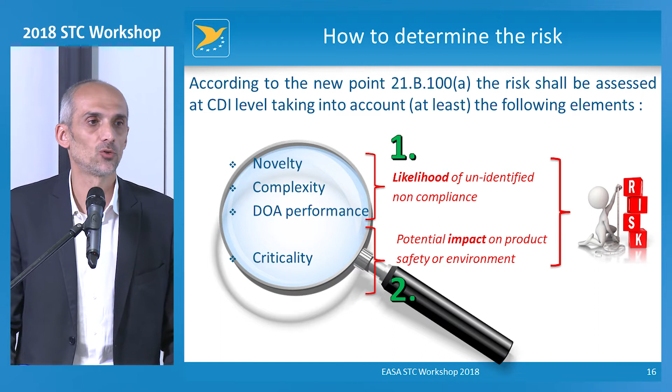The new Part 21 does not tell you anything else. It does not tell you how the novelty is to be determined, or complexity and so on. And it does not even tell you how the likelihood and the impact on product safety or environmental protection work together. So to find additional guidance on these elements, we have to look into the AMC/GM to Part 21 and the certification memorandum on LOI that we published last year in January. In the next slide, I will show you what is in these documents.

So, novelty. According to our certification memorandum on LOI and the AMC that we published in NPA 2017-20, consulted last year, novelty is classified as a binary element. One CDI can be either novel or not novel. We don't have any intermediate possibility, only black and white. Novelty can be driven by technology, operation, installation, new requirements, or use of means of compliance. This is just a quick summary; the guidance gives a very detailed description.

And novel can be for the applicant or for the agency. I think it's quite rare, but if an applicant already has good experience on something which is new for the agency, then it has to consider this CDI as novel, even if it already has some experience.

With the criteria of novelty, things can change over the years, because something which is novel today can become no longer novel in the future if you continue working on this kind of technology or operation. In the same way, if your experience on that technology is very old, like 10 or 15 years, then you should consider this technology novel again, because probably you don't have...

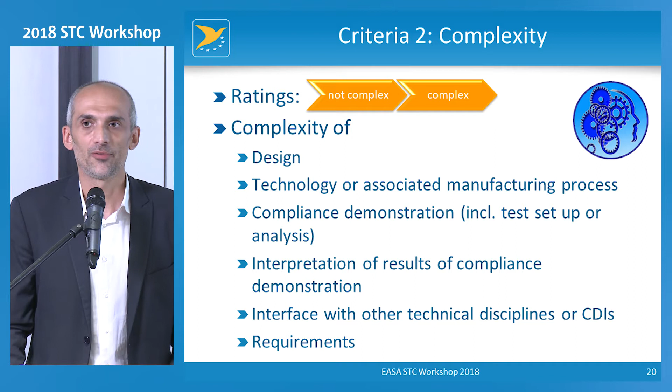Then the third element of the likelihood of an unidentified non-compliance is the DOA performance. In this case, the rating can be on 3 levels. The first one is low or unknown, for example, for a new organization. Then medium or high. The applicant does not have to make any specific evaluation on this, because the DOA performance is provided by the agency. And normally it is provided at panel level if we have enough information.

Okay? So in general, the red indicator is the indicator to be considered when you have to determine the DOA performance for your CDI. In case the red indicator is not available, because it can be that for some panel we don't have enough data, then you can consider the overall indicator of your DOA. This is what the guidance tells you in the AMC GM to Part 21.

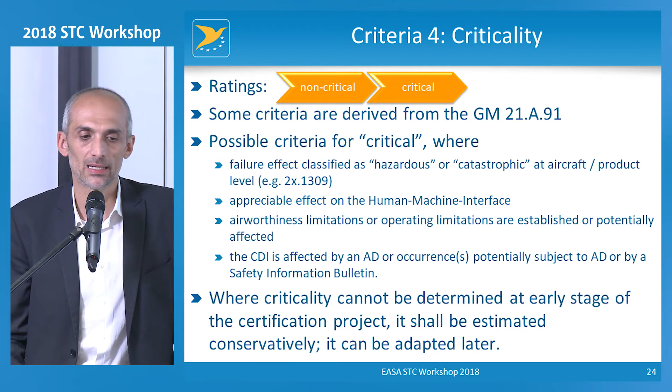I'm quite quick on this point because I explained this last year, and now I want to focus more on the feedback that we had during the advanced application phase. We have these 4 criteria, and now let's see how these 4 criteria work together. This slide is a repetition of what we have already seen before. Part 21 gives you the criteria, but does not tell you how these 4 criteria can work together. So now, what I will show you is how they work together.

And to see this, we have to open the certification memo on LOI and AMC GM to Part 21. So in these documents, we find 2 matrices, which tell you how the criteria work together. The first matrix is the matrix used to determine the likelihood of the unidentified non-compliance with the certification basis. In this matrix, we enter, in the horizontal axis, with information related to novelty and complexity. So we reduced the matrix a little bit to 3 columns to simplify it.

So in the first column on the left, you have a CDI which is not novel and not complex. So if this is your case, you enter in that column. Or if your CDI contains some elements of novelty but not of complexity and vice versa, you will enter in the middle column. And in case your CDI contains both elements of novelty and complexity, you have to enter on the right column.

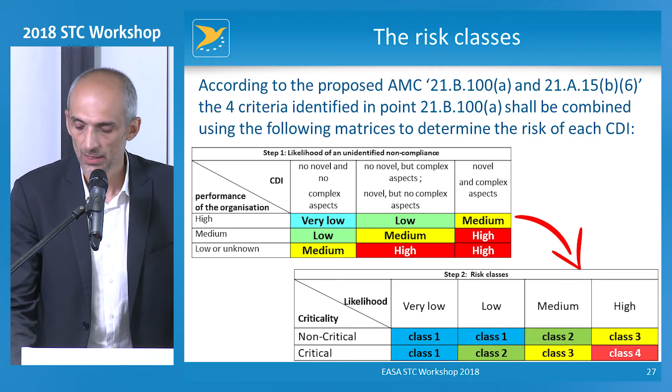Then what does it mean, risk class 1 or 4? According to the information that we provided in the guidance, risk class 1 means that for that CDI, there will be no more involvement of the agency. So no element should be retained by the agency within that CDI. If the CDI has a risk class 2, there will be few elements, meaning documents or in very rare cases some activities, which can be retained by the agency, but the vast majority of the documents, data, and activities contained in that CDI should not be retained by the agency.

Then, for risk class 3 and 4, there will be more and more involvement of the agency. We don't have any fixed value, and even risk class 4 does not mean that the agency will be involved in all the activities or documents or data contained in that CDI, but as a measure of involvement, risk class 3 and 4 means that there is more and more involvement of the agency.

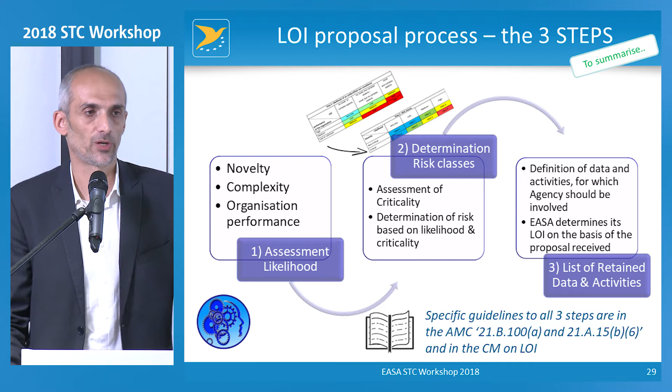On the bottom, you see specific guidance for all these steps is provided in the certification memorandum LOI and in the AMC 21.B.100(a), 21.A.15(b)(6). This applies to all applications for a new TC, for an STC, for a major change or a major repair.

So if you want to make a break.

Yes. So, not surprisingly, we have lots of questions. Yeah. You can go, Franz.

Redak here. So first question, is there any introduction of time frame considerations in the LOI for the certification plan, certification program assessment from EASA? No, in the guidance material, AMC of Part 21, you will not see any statement for this. But internally, we are trying to speed up this process. We have an internal KPI to speed up this. If you expect to see something at the AMC level, you will not find anything there.

But again, this is a commitment that we want to take, and we have already taken. So we are monitoring our performance in this respect. It's true that when we receive complete and mature proposals, this will facilitate our determination of level of involvement. This is obvious, but yeah. We know that we have to ensure a good performance in this frame, and we have an internal KPI to do that, but that's all. Thank you.

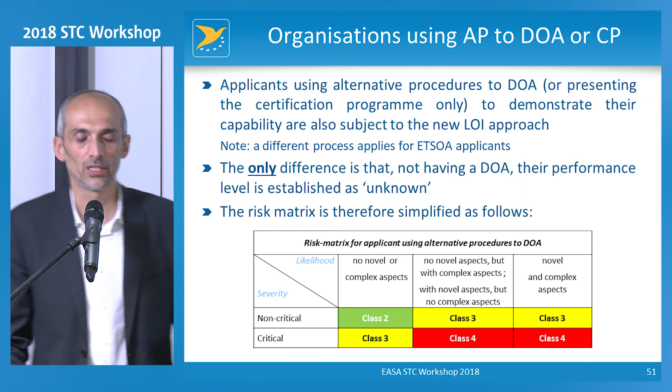So basically what I told you until now is valid also for applicants without a DOA, provided that they apply for a new TC or whatever. We have published an MC focusing on this kind of applicants. So we can also accept applicants without a DOA for the advanced application phase. So if any AP to DOA is interested to join this advanced application phase, we now have the possibility to test the guidance, and we will welcome them.

I just want to say, first, thank you very much, because this was really a journey. What I liked a lot was the updates, and there is so much that has been done in these last few months. And thanks to the proactive attitude of all our industries that were willing to cooperate and to test. So I think it's really great work.

And now, before giving the floor to the two industry presenters, do you think it's okay if we leave some minutes for a couple of questions, specifically on this second part? Not more than 2 questions, so we capture some of the inputs, and then we move quickly to the 2 presentations. Is it okay? If you have time, yes. Okay. We have many questions from Slido. So we will try to address 2 of them, and the others will be captured and properly replied. Okay, Nicolas. So let's try to be efficient.

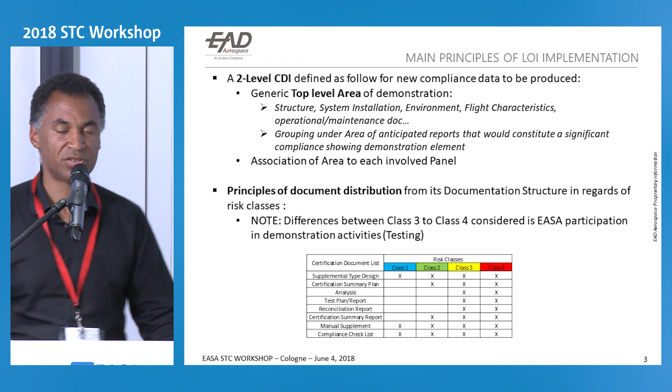And also, one other element that we have been using is our documentation structure. In fact, we have been defining a simple documentation structure, starting from the certification plan to the definition, what we call the supplemental type design, and then we have summary plans that give what we will do exactly during the certification process. And after, we have more detailed specific documents, which are the analysis, the certification plan, the test plans, the test reports. And at the end of the certification exercise, again, we go back to a summary report to explain exactly what we have done in summary. And also we have the last documentation, which are the manual supplement and the compliance checklist.

So based on this documentation list, we will provide an assessment of the LOI. As I said, we have implemented, in fact, a structure within the aerospace to be able to substantiate and to install large antennas. So this example today will be based on this typical subject for us, with the installation of a Ka-band connectivity antenna on an aircraft.

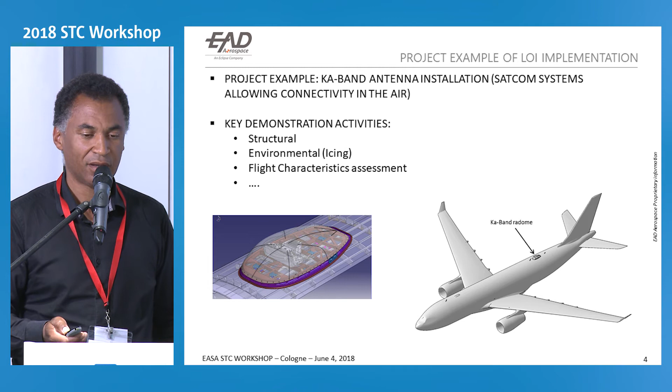Okay, so the specificity is that we have conducted more than one project like this. So we have gathered already some experience from our first project, and we have identified some elements that we'll use during the next project. So that's why here is a summary of our demonstration items, and we have a specific one, which is existing data that we have qualified as a CDI. So these are existing data that we will use for the other project.

And for the complementing demonstration, we have provided other CDIs. As I said, CDIs with a level 1, which is the structural assessment. Then we have flight assessment, and we have at the end the documentation CDI. So 4 CDIs that we have been identifying. Then, and you can see on the left side, we define the second level of CDI, meaning that for each CDI we have associated panels.

And based on this identification, then we do the risk assessment of these CDIs to make sure that at the end we'll document the risk class as expected by the certification memo and the current GM material that is provided, to see if it is acceptable to work like this.

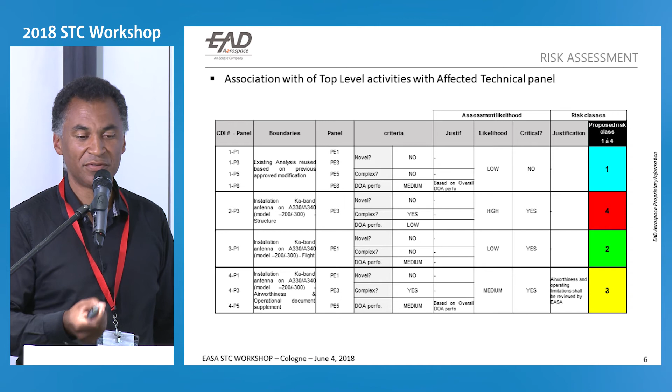So the interest of having a 2-level CDI is that we can also think of having different risk assessments. For example, I can have the first CDI with a different risk assessment depending on the panel, and at the end, we have a different proposed risk class. So either I can gather, or depending on the availability of data for having a specific risk assessment, then I can ungroup this CDI.

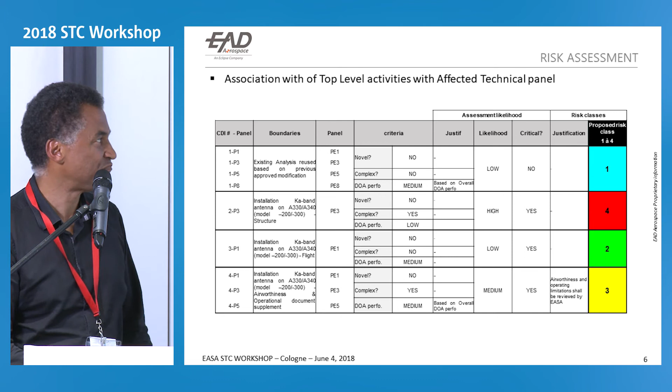Okay, so once we have made the risk assessment, we have developed in our certification program, for each compliance data to be distributed or to be established... In fact, we have gathered that in a table. You can see on the right side. For each compliance document, we have identified in the column on the right the CDIs with, at the end, the risk assessment, so that permits us to identify which document shall be distributed or not to the authorities.

So this is part of our certification program, and again, as we said in the note, we can also think of having a CDI specific to each panel when a top-level area falls to different panels for the demonstration at the end.

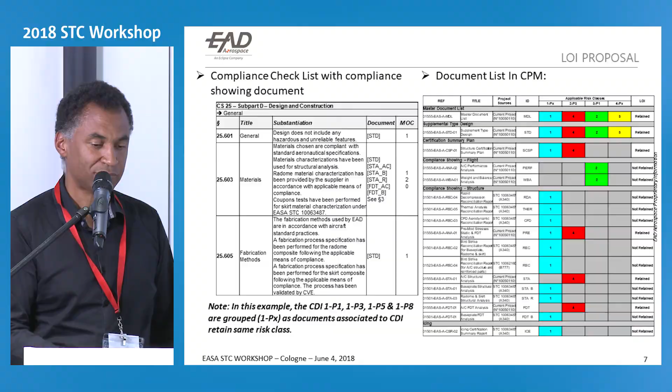So today, what has been the feedback about the experience based on this usage of CDI, of LOI? In fact, yes, the difficulty initially was to define these CDIs, because with CDI we have to think: shall we go to a very specific element, or, as Leonardo explained, as we have a project which is not a very big project, shall we go to a single risk assessment?

So we have preferred to go to a grouping and to make it interesting, to make sure that each expert can have his defined involvement and decide on his involvement. So that's why we have tried to have a grouping, some kind of smart grouping. And that demands of us some efforts in the CPM writing.

The next step will be for sure to update the organization procedure to make sure that the guideline for defining the CDIs can be adapted and adopted by all the team for certification, to make sure that everybody in the company will apply the CDI regulation the same way.

And what we have identified was also the DOA performance dashboard, because it was an issue for us sometimes to understand how the performance was provided by the experts, as we didn't have the same feedback internally as the expert provided on a previous project. So we had to discuss exactly what the feedback from the expert was, to make sure that we properly capture the issues that the expert had identified in our performance. We have discussed that.

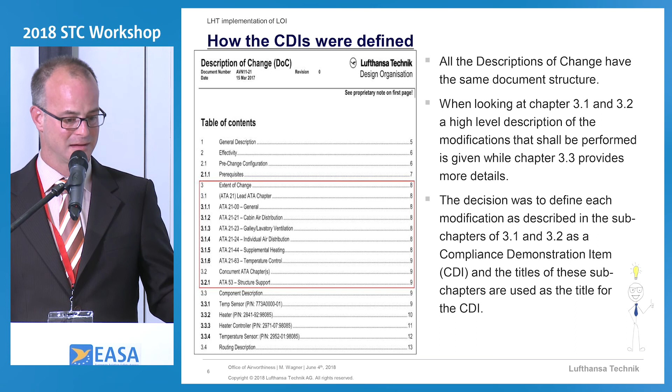So we defined our CDIs in the same way as the description of change is detailed, and said, okay, we take those descriptive parts, those topics, those headlines of the descriptive part as our CDIs. First of all, the advantages. It's always better to start with the advantages. The existing design documentation does not need to be changed, so we can keep our design documentation as it is. The design engineering is more or less not a part of the LOI concept. It's all done by the Office of Airworthiness. It's all done by the certifying staff.

And the titles of the aforementioned subparts, 3.1 and 3.2, were also already implemented in our compliance checklist. So the same titles you can see in the description of change, you also find in the compliance checklist again. And in the future, we said, okay, then we can also integrate it in our level of involvement and identify the CDIs. So it's 3 documents in the end, where all the titles are the same and the CDIs have the same titles. So it makes it easier to identify again.

The disadvantage. The subject project consists of 27 individual descriptions of change. So for structural modifications, installation of walls, installation of curtains, installation of whatever, air conditioning system, water system, and so on. Even if each description of change only has 3 modifications mentioned there, you already have 81 CDIs, which is a lot. I was a little bit surprised that 45 projects only had 420 CDIs defined. I have at least 100 in this project, so the other projects only share 320 CDIs, so okay.

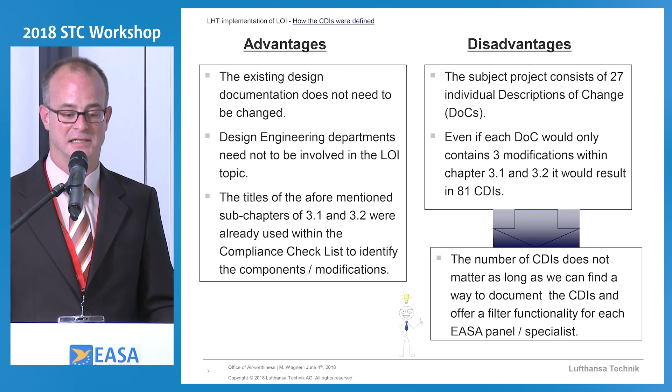In the end, we said, okay, the number of CDIs does not really matter as long as we find a way how to document it and how to provide a filter functionality for the individual EASA panels. So with this filter functionality, each EASA panel can just filter the whole bunch of CDIs to just their CDIs. And then it's a lot less work and it looks much better. If it is possible, I would like to show you. It's Excel-based in the end, what we did. And I would later on like to show you the latest, not the final, but the latest version of this Excel file.

How the proposed LOI is documented. So, as I already said, we have generated an Excel file, which we of course provide as a signed PDF later on. This Excel file we have titled Level of Involvement Table, which is exclusively handled by the Office of Airworthiness. The LOI is Excel-based, as said, to provide to EASA and also to our staff the filter and sorting functionalities.

The LOIT, the Level of Involvement Table, contains information about the design, so the reference to the description of change, to the CDI, and to the CDI-related EASA panels, the information about the classification of each CDI, the proposed level of involvement, and also a column for remarks where we can add information about the classification and why we identified this as a risk class 2, risk class 3, whatever, and also put some additional information in there after the discussion with EASA. So for example, EASA specialists request a document just for information. We can put in there, hey, provide this document just for information, just as an example.

So the LOIT uses the same titles for the CDIs, as I already said, as the DOC does, and also as the compliance checklist does. And we have just generated some CDI numbers to identify those CDIs and reuse this CDI number for the LOI later on. So we propose a level of involvement, add a number there, and if during the discussion with EASA additional involvement comes up or a request for documents comes up, we can easily add a number and we're done.

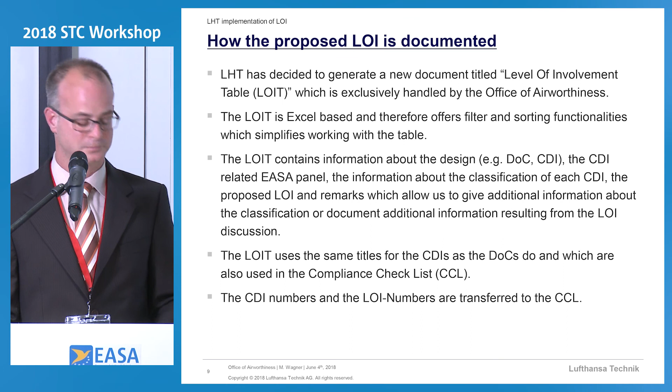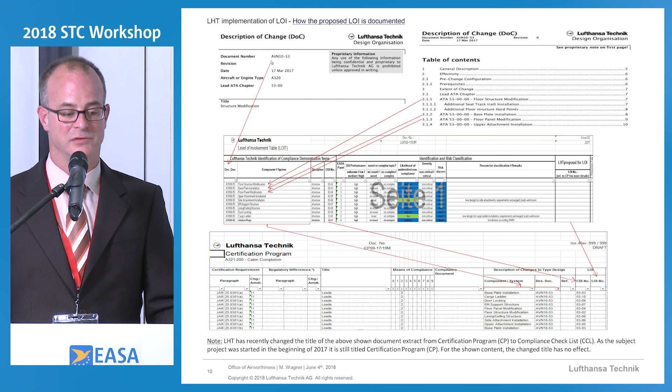There you can see in the first column the document number, the description of change number. The second column is the component and system, which is taken from the description of change. And there are some columns with internal definitions of which part of engineering is involved, so structure, avionics, systems. Then we have the EASA panel that is involved in this modification or for this topic. Then we have the risk classification and the reason for classification and remarks column.

And at the end of this file, you can see the level of involvement proposal, the LOI. I hope that everybody can read it. The first two columns are directly transferred to the compliance checklist, so the component and system and the description of change. And the CDI number is now also documented in the compliance checklist, as well as the LOI number. First of all, our proposal, and later on, when it is agreed, all the LOI numbers are in there.

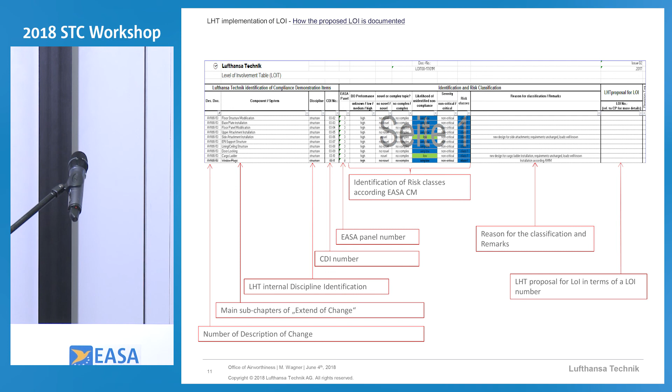Can you now open the Excel file? This is the same; I just wanted to show you this because in the presentation it's very small and not that well visible. There you can use the filters. Could you, for example, please put a filter on EASA panel 11 and just zoom out a little bit?

There you can see these are the CDIs for the complete cabin completion for panel 11. As I said in the beginning, we have something like 100 CDIs identified in total for the complete cabin completion. And this is just panel 11, so I would say something like 20. So each EASA specialist can filter on his EASA panel number and just see his or her CDIs to take care of. And there you can also see the risk classification.

The advantage of this Excel file is that you can easily change the DOA performance for the panel. You just copy it down. So if they downgrade us to low or whatever, we can change it very easily, and the likelihood of the unidentified non-compliance and the risk class adjusts automatically. Okay, can you go back to the presentation, please?

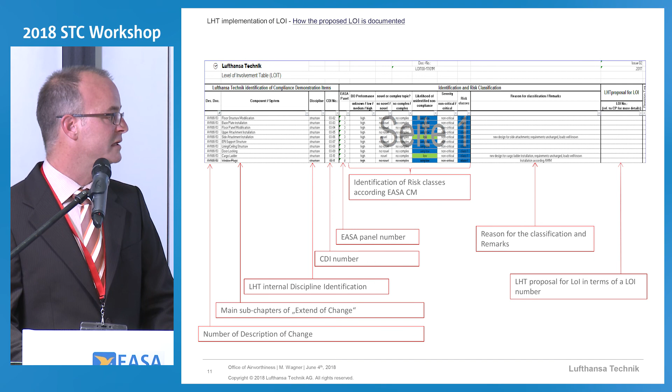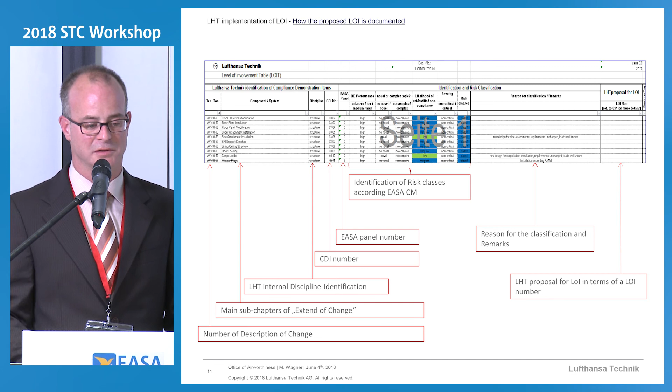This is again what I already told you: the explanation for the description of change number and the individual columns. After providing the level of involvement table, the compliance checklist, and all the descriptive parts of this project, we thought, how can we handle it without traveling something like 17 times to EASA in Cologne, for 17 EASA panels, to discuss the level of involvement and how the concept is set up with each individual panel?

So we went there once and covered 3 panels at the same time, and afterwards we did it via telephone conferences, explaining the complete concept and discussing the level of involvement. They had some disagreement with our classification, so we adjusted it during the telephone conference. They just requested some additional documentation, so we added some LOIs to our table and compliance checklist. But all in all, working with the EASA specialists was really harmonious, and there were no real bad discussions.

It's a completely different concept from what you have seen previously, but it works for us. It's easier for us to break down the complete modification on the aircraft into small packages and small modifications, and do this risk classification for each and every CDI. It's a little bit more work in the beginning, but in the end we figured out that we have something like 15 LOIs to provide for the complete cabin completion to EASA. That's it already.